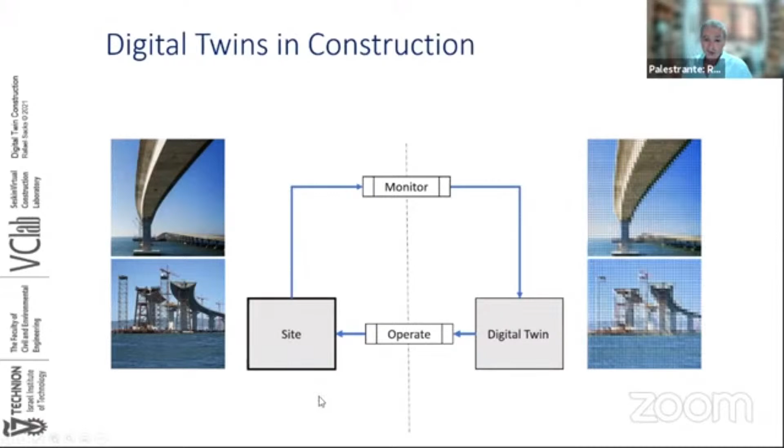Now, when we talk about the kinds of monitoring we can use in construction, they include a range of different things, from the basic kind of Internet of Things sensors like temperature, humidity, density, quantities, and so on, through laser scanning to build digital point clouds, photogrammetry, which might use 360-degree cameras or other images, through barcodes that might be read through barcode readers on the site, radio frequency IDs or Bluetooth tags that can be sensed by people's cell phones or smartphones or other equipment.

Many trucks and tower cranes and a range of other equipment have what we call a black box that monitors its equipment as it's operating. And some of those companies already have the telemetry that we need in order to get that information into the cloud and then into the digital twin for the project. We can also have people on the site using their smartphones to report things and to confirm that something is done or not done, or there's a problem, or take photographs.

We also have many construction companies operate enterprise resource planning software, like SAP or others. So purchases of materials, payments of salaries, accounting, timesheets for workers, and all these kinds of things are all available digitally. And not to forget that we also have audio recordings that we can also use.

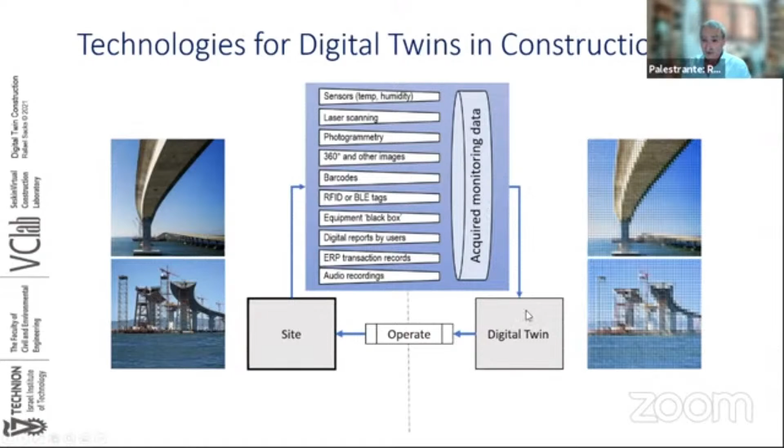And then we acquire all this monitoring data. And although I show this in a single arrow, we need to interpret it all to try to build up this digital twin. And of course, that's not trivial. That's really complicated. So the complication arises from the fact that the amount of information, the amount of data that's collected here is very, very large. And we can't use that raw data.

So what we really want to achieve is this thing called a project status model. Now, a project status model is a bit like a BIM on the left here, but a building information model really tells us what is the future of a building. A project status model tells us what's the present and the past of a building.

So to go from this raw data through to the project status model, we have to do a lot of work of interpreting and merging the information. And this is largely done with artificial intelligence. And that may be with rule-based systems or with image processing, computer vision, and other things. And so we're trying to go here from data to information.

The reason that we want to use the BIM as a supplement for information here is that often it's much easier to interpret something I can sense when I know what to expect. So if I have a point cloud with points that fall on a particular wall, of course it's helpful to know what the intent was in terms of having a wall in that place. Then I find points on that wall, I can make some logical conclusions about what those data points in the point cloud represent.

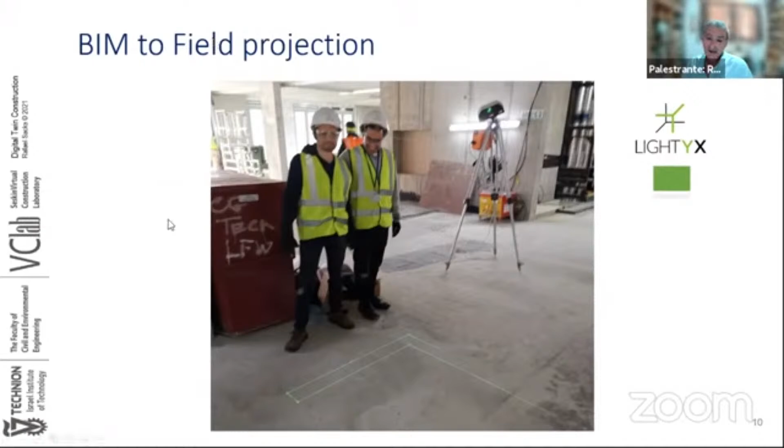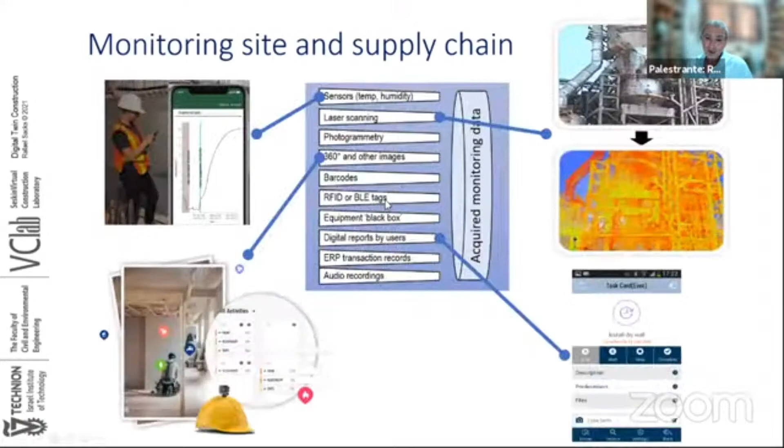But of course, the big challenge is this, and I'm going to go back for a moment to here. Each of those applications that you already see being developed, they each fit into just one of these sources at the bottom. None of them do this interpret and merge step, where they take information from multiple sources and create real project status information. It's not good enough for me to know, for example, that here there is an electrical socket missing, or that it's in the wrong place.

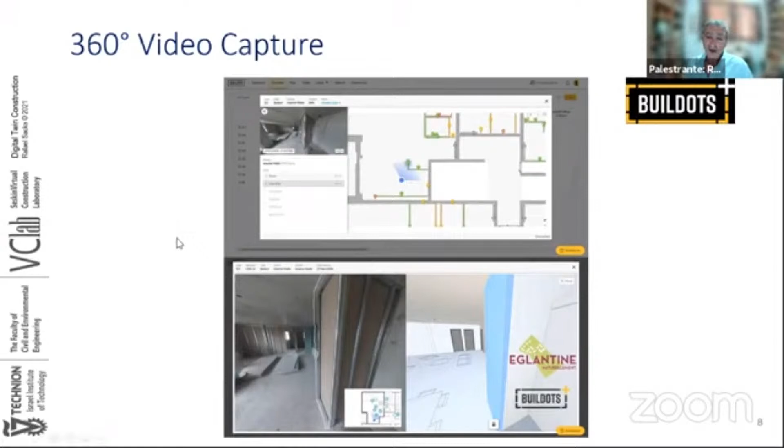I really need to know why it's in the wrong place, who put it there, how long it took them, what their productivity was, were there any other objects in the way which forced them to do something different. In other words, there's a whole context of information around that that I need to know to be able to say, okay, what should I do about it? What's the next step? So for making intelligent control decisions about what to do, it's not enough to know data or information. You have to have knowledge. And that knowledge has to have the context where you merge all of that information.

And we have a separate research project dealing with that. It deals with complex event processing, and I'm not going to get into that now. But what I do want to do is say this. When we think of the digital twin, what we really want to do, because we have a closed cycle of monitoring and operating, we want to use the real-time information streams to enable a closed-loop model of construction control.

And the best model we have for that is from lean construction, and that is the idea of plan, do, check, and act, or what is known in manufacturing industries as the PDCA cycle. And of course, we do this continuously. So in every planning and operation cycle, we plan, we do something, we study it, we check it, and then we take some action to change the way we're working, and then we repeat and do that repeatedly until the project is finished.

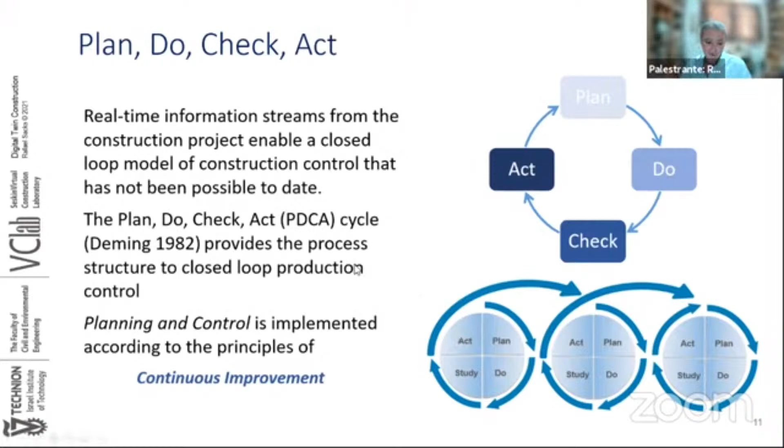So if I think of this cycle of plan, do, check, act in the context of the digital twin, then actually the first thing we're doing is we're doing digital modeling of a built facility. So we build a BIM model, and the BIM model is not only the product, but it's also the process. So we're talking about not just what we build, but how we intend to build it, and when we intend to build it, and who will build it.

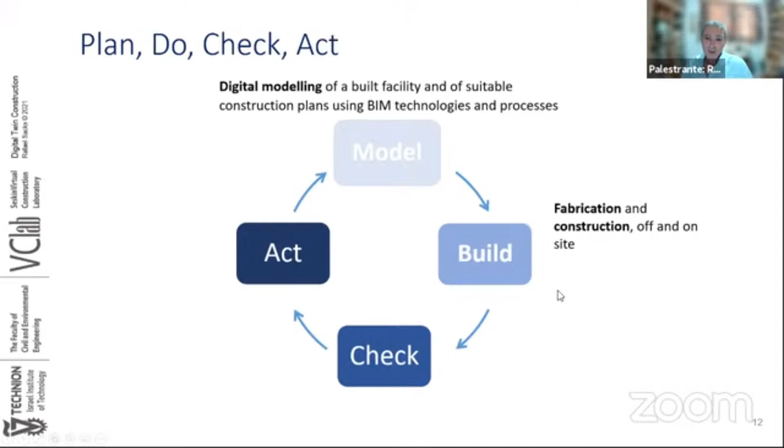And then we build. So we fabricate things off-site, we construct things on-site, and we operate the building site. And then, as I said up to now, we monitor and interpret. So this is the digital monitoring of the facility. We interpret that information using some intelligent software to generate what we call the process and product status.

And then we want to evaluate and improve. That's the act part. We want to evaluate what we've done. We also want to evaluate alternatives for going forward. I have a construction plan up to now. I have a schedule. But if I continue that schedule, what will happen? And if I change the schedule, if I change the construction plan or the methods, what will be the outcomes?

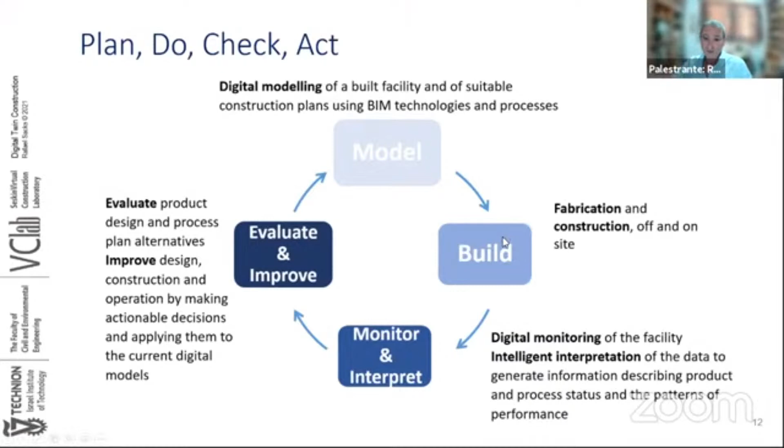And if I can do all that, and I come up with some better plan, an improved product design, then I need to go back to my model, change it in the BIM model, change it in the construction plans, and then use those to build in my next week or month cycle. So on the basis of that idea, we have a process map where we try to lay out the different components and aspects of what we call the digital twin design and construction process.

So you can think of it like this. It begins, of course, with the plan, do, check, act, and it's a series of these cycles. So if I do this, I can say, well, our process begins with designing. So I design some product and I plan a process. When I design the product, what I generate from that is our project intent information.

And I'm going to go back here just for the sake of these definitions. We have here PII, the project intent information. This is what I intend to do. It incorporates the BIM model. This really is the BIM model. On the basis of the BIM model, which is as-designed product and as-planned process, I then go and build. So I build the building, I operate the construction. That generates a physical twin. Now I'm generating real buildings.

And then I monitor them. And I monitor them using all of those technologies I mentioned before. And they generate for me raw monitored data. Now here, I want to call all this digital side the digital twin, but you can see right away that if this here is the BIM model, the PII, then that's quite different from all the rest of this stuff. So what is the rest of it?

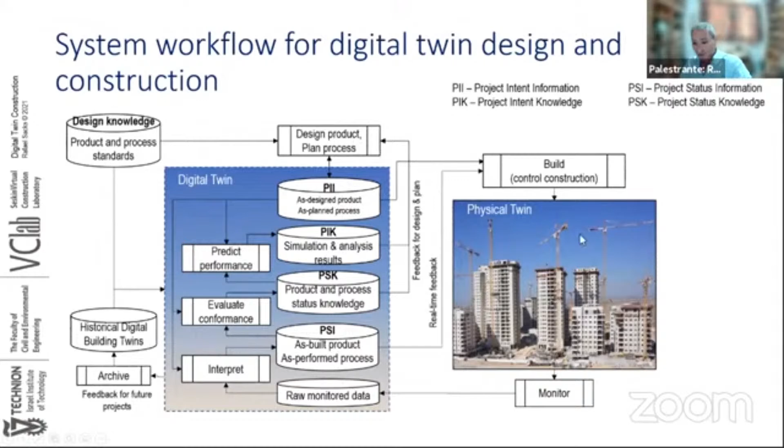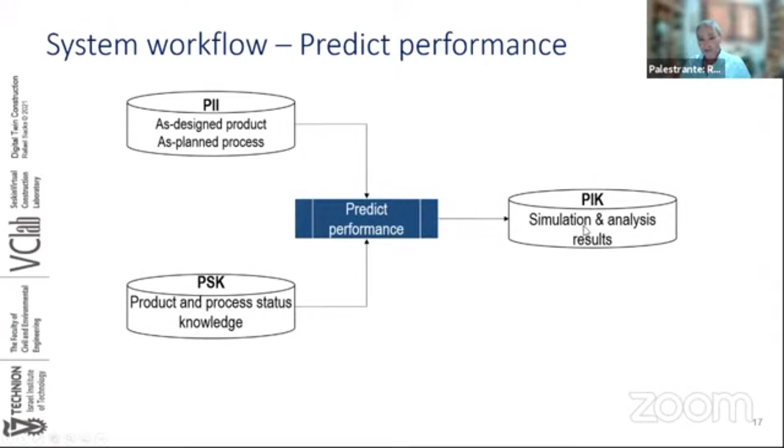And based on that knowledge, I'm going to redesign, replan, change those things, put them in the PII, build, and continue my cycle. And so if I think of it that way, if I focus for now on the predict performance part, then I'm comparing the project intent information and the project status knowledge about what the situation is. And I'm going to use those two things to try to predict what might happen in the future. And that will give me a basis of information for making decisions about what to change, if anything.

But then what we do is we begin now and we say, first thing, we need to know some things from the user, from the construction managers. These things are constraints, they're future constraints. When will equipment be available? When will it not be available? When will resources be available, like workers, like materials? What are the weather forecasts? A range of things that we might know about the environment, about the constraints that operate on our project.

On the basis of those constraints, we can generate what we call alternate plans. So I have a baseline plan, my current construction plan, and now I want to generate alternatives. Those alternatives are dependent on my constraints. So I might say, I'm using now 4 crews of floor tiling workers. But actually, if I need, I can have 5 crews or maybe 6 crews. So my freedom of action is to reduce crews or to add up to 2 new crews.

Once I've generated some alternative plans, I need to evaluate them. And that we'll do here in the simulation. So the simulation will tell me if you do A, the result will be B or C or D or something else. And actually, if I can simulate them, I can create an optimization loop where I say, if this is my alternative plan and this is the outcome, let me evaluate that, change my alternative plan, run it again, and I can do optimization here with genetic algorithms. And this is a fairly well understood process. So this is not necessarily something new, but the result is we can get new alternative plans, which are really quite good.

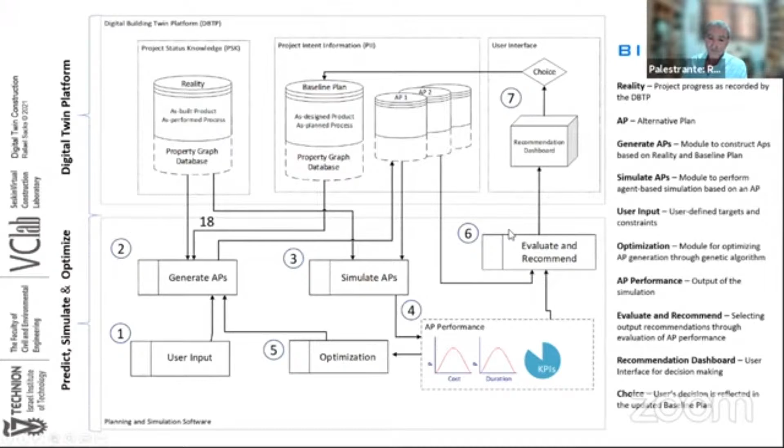So if you think of it this way, to try and explain it a bit more simply, we're taking, as I said, the baseline plan from the project intent, the project status knowledge of where we are. We have targets and constraints, like we can hire 1 more worker, we can purchase 2 more pieces of formwork, we can change the concrete pump. These are process actions.

We can change the method of doing the flooring. We can change the type of facade. We can maybe change the stair elements from cast in place to precast. These are product actions, or freedom of action, things that we can do. And based on all of these, we can generate alternative plans. Now, any given alternative plan is some combination of all of these steps that I might take.

And then if I have that database now of alternate plans, I can use my status of the project and perhaps historical data to get the construction plan, the building elements, and the agents that will be working. And I can run an agent-based simulation, and I can predict the performance. And what I'm showing here is the idea that the simulations are not singular, they're multiple.

So because it's a random number generated simulation, we don't get only one result, we may get hundreds of thousands of results. And so we have a distribution of results for the duration and for the cost, and perhaps for other key performance indicators. And these KPIs can be things like the quality of the flow, the amount of work in progress, the cycle time for individual products, and a range of others.

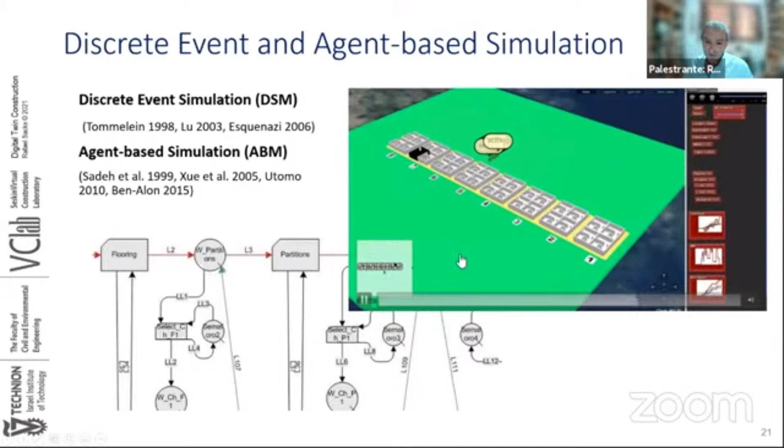Now, you might ask, what do I mean by the simulations? And I'll give you a quick idea. This is previous research that we have done. And some of you might be familiar with the LeapCon simulation, live simulation game. Well, this is a computer simulation of the same game, but the idea is that you have 4 contractors, and in the computer you simulate how they go through 8 floors of a building, and they build apartments, and as they go, they do different pieces of work.

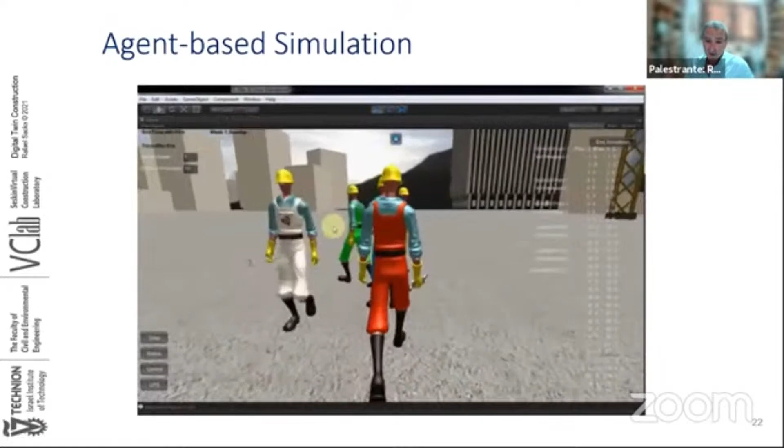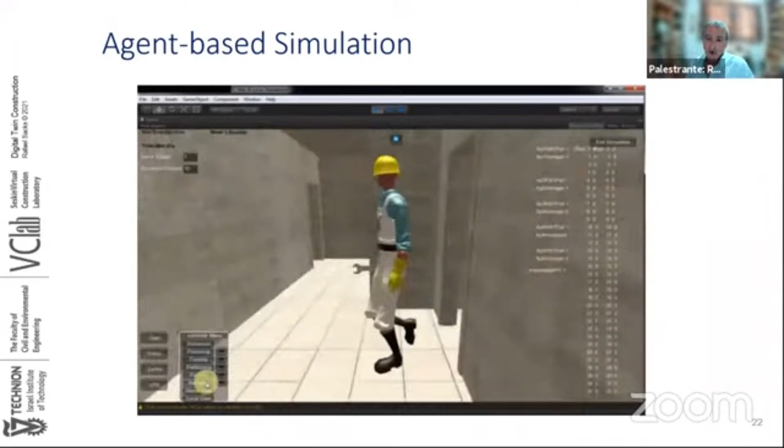This is another simulation that uses a BIM model and an agent-based simulation, where we see 4 different crews doing flooring and painting and plastering and drywall construction, and the computer can simulate their movement through the building. And of course, this is what we call emergent. That is to say, we don't program where they go, we program their behavior and their decision making.

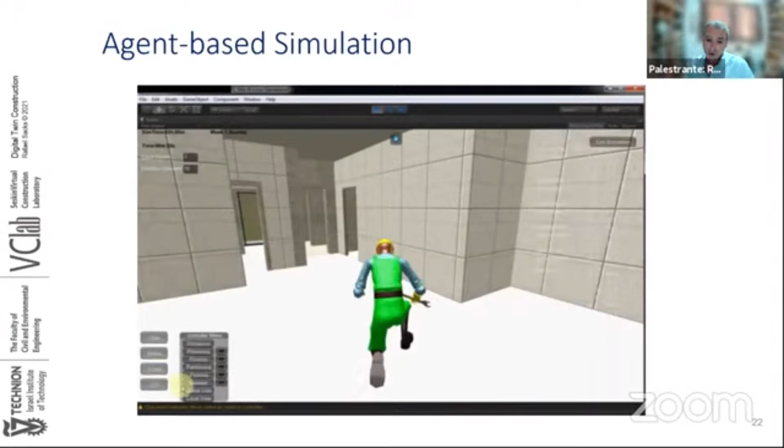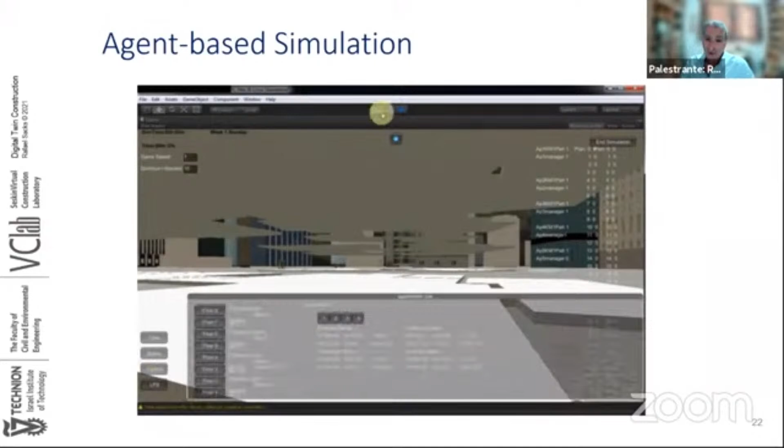And they then get information from the physical reality of the site. They make independent decisions according to the conditions that a subcontractor might meet on a real construction site, and they go and do the work. And the eventual duration and cost of the project is what we call emergent. And I'll show you just one last one to strengthen the idea.

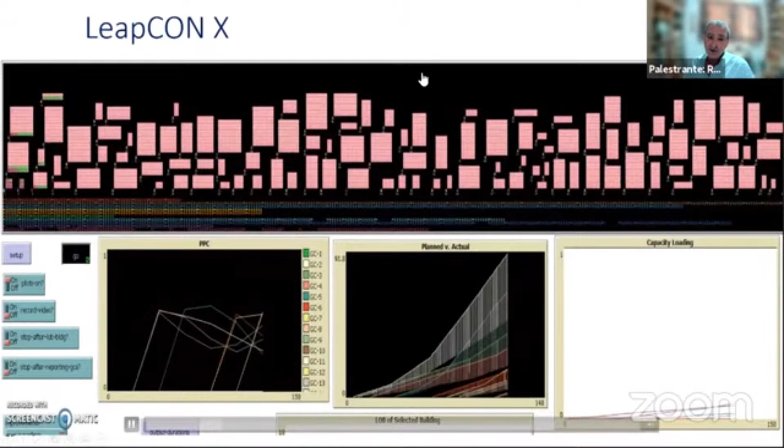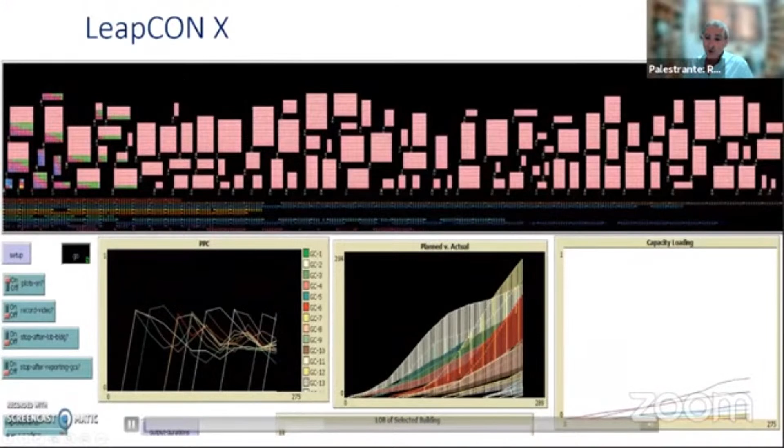What we're seeing here is a simulation not of one single building, but of an entire construction metropolitan area. This is a model of Hoboken, New Jersey. And each of these rectangles represents a building under construction. This represents 4 years of construction. Okay, so each building has a certain height and a certain number of apartments on each floor. And you see here the colors that are running, they run as each contractor goes through the building. And you see down here that slowly you see the development of the S curves for each project.

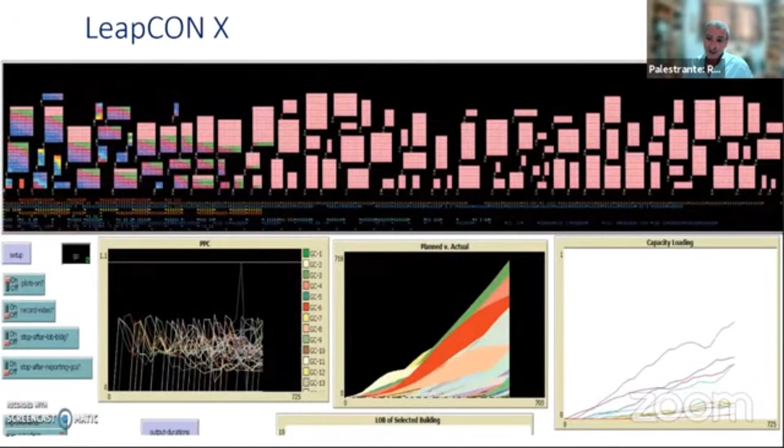So you can simulate these things not only on a single building. The reason that we're interested in multiple buildings like this in a simulation is that in any environment, projects compete for resources. So your subcontractor might be working on more than one project at a time. And that means that each project impacts on every other project that's running in parallel.

So this is the kind of dashboard that we are now designing with the idea of thinking to ourselves, imagine we have digital twin construction, imagine we're able to do the monitoring and get the status information and do the simulation and get the results. What kind of interface then can we expect to present to construction managers on site to give them an idea of what to do? And what this dashboard is trying to say is this.

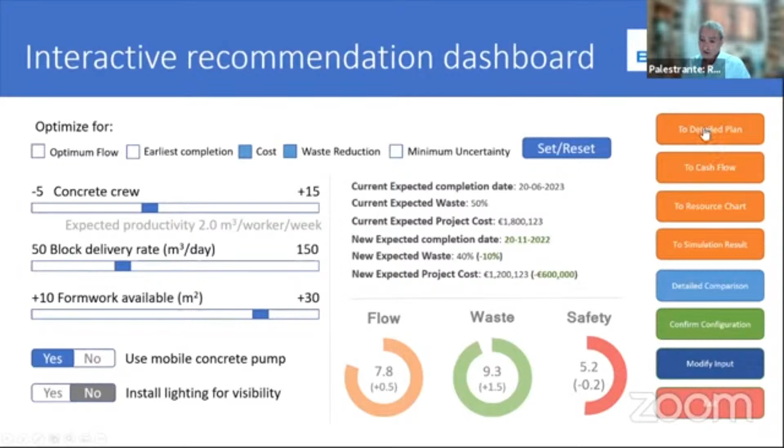So it's giving you a forecast from today to the end of the project, what might be the outcomes. And if you'd like, on the basis of those selections, to know more information, you can go to some of these buttons on the right-hand side here and get more information. So for example, you might say, if I make those decisions, how different will it be from the previous situation? So my current baseline plan might be here, and my new plan might be here.

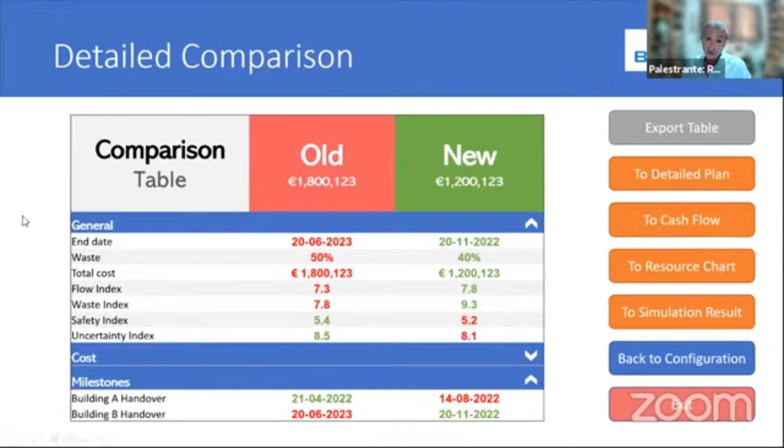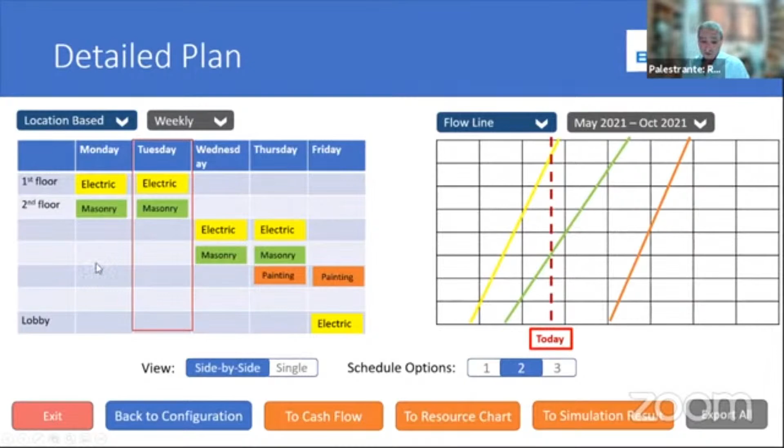And we might say, for example, if we're doing a detailed plan for a week, where are the different laborers going to be, where are the different crews going to be on the different floors of the building through the coming week? And how do we expect the flow of their work to look? Will there be intersections between crews? Will there be conflicts and so on? We might also say, what cash flow can we expect? And even, tell me also the histogram of the number of workers I can expect to have on site during this coming period.

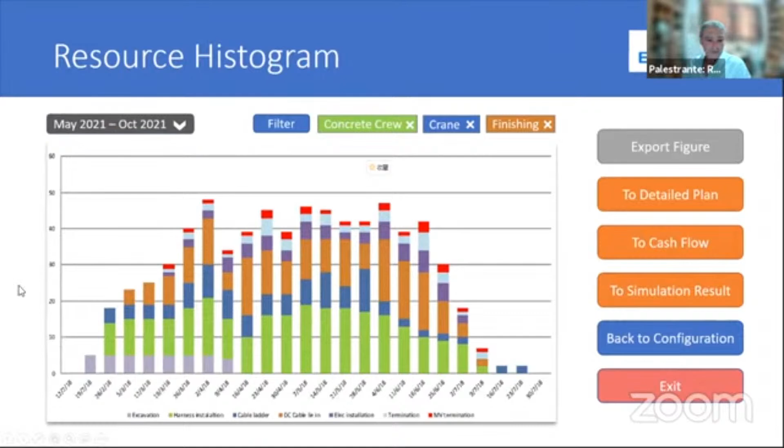Now, of course, you can make the leap of faith now and say, this control room does not have to be at the construction site. That control room can be somewhere else. Why not put it in the headquarter building of the construction company? That way we have fewer people on site and they can run it from here.

And then you can make another leap of faith and say, well, actually the control room is the same for any project. It's only the information that changes. So why don't we have a team here that manages more than one project? Maybe they manage 10 projects or 20 projects. Maybe each day they focus on one project. Or 4 projects per day, and they can do a site meeting once a week for every project.

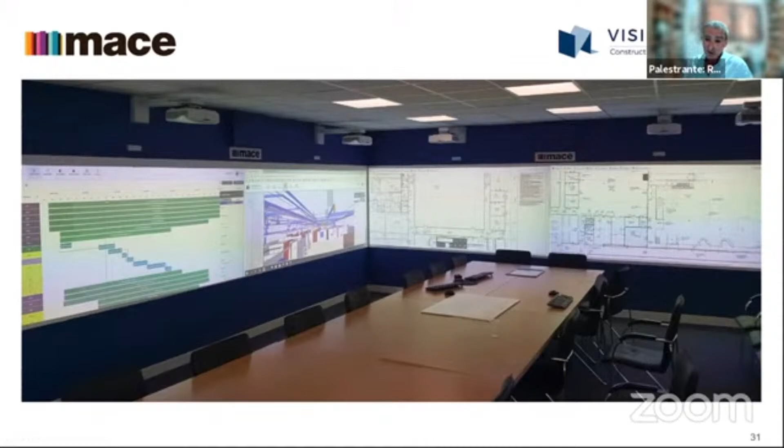Now, I should mention that this control room is not a mock-up. This is a real project control room from a project of Mace, which is a big UK construction management company. And this is from a computer server center that they built in Ireland, I think 2 or 3 years ago. And they use both BIM and VisiLean and other software to do this. So these kinds of construction production control rooms are starting to become real. These are on site, and there's no reason to think they would not be somewhere else.

And now you can make another leap of faith and say, who will provide all of this computing power? Who will provide the technology for monitoring? Who will provide all the AI systems? Well, it may be that there will be software or startup companies that offer this as a service. And then a general contractor might be able to subcontract production control to a central platform company that's running the same software for everyone. And that production control company could be a platform, a bit like Uber or Deliveroo or one of these major platform companies.

And so the potential exists for digital twins for construction to morph into something we call digital twin construction, where some of the current functions of construction management that are currently run by contracting companies may move to professional platform computer-based AI construction management, digital construction companies. And that's a radical and major change that we may see in the future. But the more we automate the information, the more likely this becomes.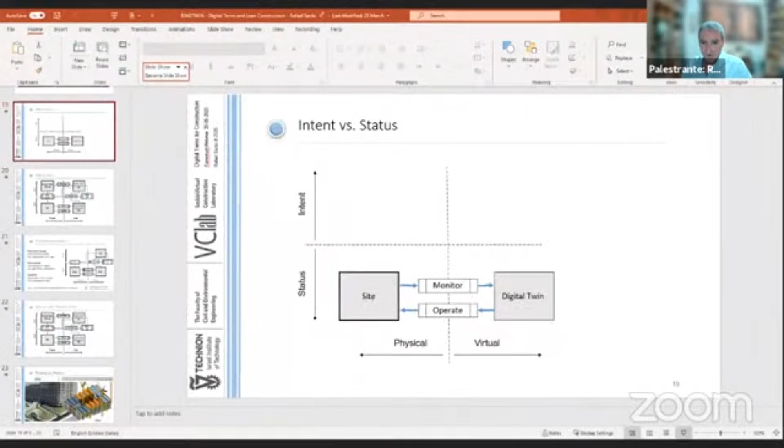I'm going to see if I can just show you a different lecture on this. Okay, please. Yeah, just bear with me a moment because I want to show one particular slide which was not in the set that I used. Let me try here. I'd like to share again, and I'll try and make this brief. Yeah, is that okay? You can see that? Okay. It's fine.

If you imagine that we have the site and the digital twin, then we have two dimensions of information. We have physical information and virtual information. So we have the physical site and the virtual digital twin. That's the first axis. The second axis we can define is a difference between what there is and what we intend to do in the future. So this axis between status and intent, if you like, is past and future.

And in the four quadrants that we now have, we can put here what I call project intent information, PII. Using the PII, we create a physical status. This is the physical building. And from that physical building, we can monitor and get project status information. This difference between project intent and project status is future intent and past reality. This part is the BIM model, because the BIM model represents what we intend to do. It's our design.

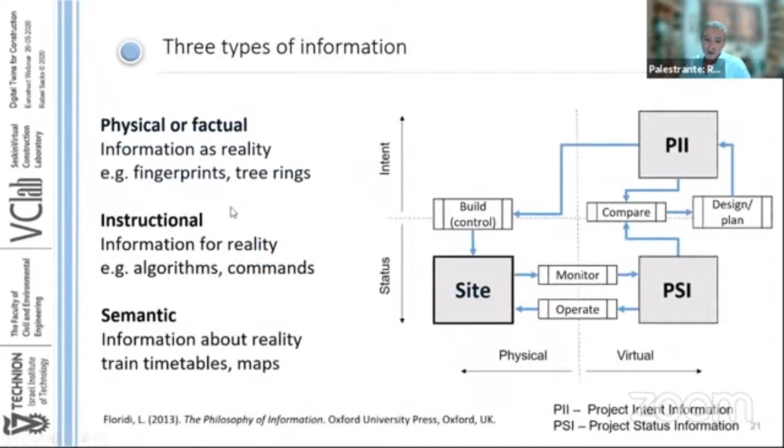If we think, for example, of doing a physical prototype, like a mock-up of a room or a window, that fits here. That's a physical expression of what we intend to do in the real building, but it's only a mock-up. But now we have another axis that I want to show you. The other axis we have is between product and process. So we have information about the building we're going to build, and we have information about how we're going to build it.

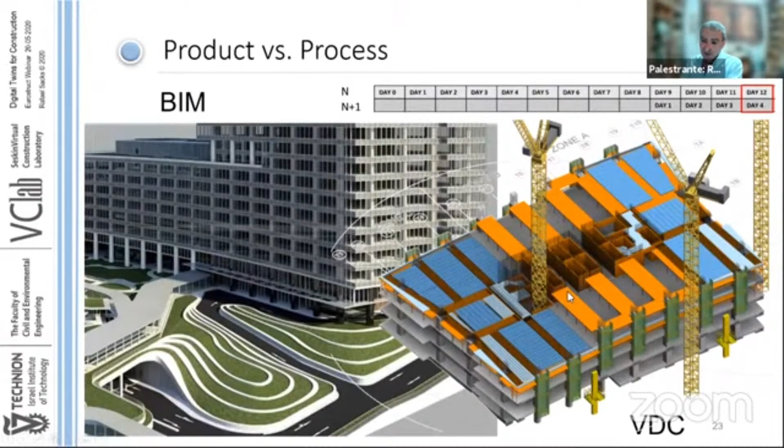Our schedule, our production plan, our production system, and so on. Now, if we think of those three axes, then we have the physical and the virtual, we have the status and the intent, and we have the process and the product. And now we have 8 quadrants. 2 of the quadrants here at the back, the physical intent, generally we don't have. So we only have these 4.

These ones, the building and construction, the construction process, that we understand very well. Those are physical things. The PSI as built and the PSI as performed is all the information about what was done. It's usually in the form of point clouds or measurements and so on. It's not necessarily building objects, but it's not what we generally think of as the BIM model.

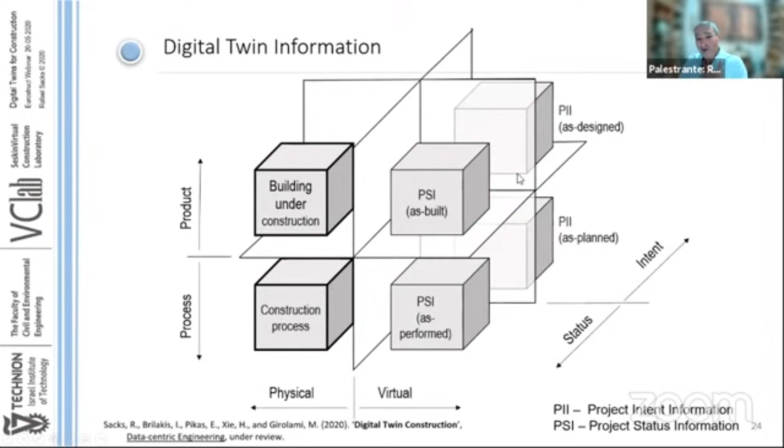So these 2 parts here, the PII as designed and as planned, this is what we think of as the BIM, at least what I think of as the BIM model. And you can think of it in this way. If we talk about digital twins as kind of people, that's our metaphor of people, then people have a lifetime, and twins are conceived and they're born and they grow up and they grow old. And so we can think of it that way.

Here is a building project with BIM. We have a start of conceptual design. We design something in this period of time, going from left to right. Then we can start some prefabrication off-site. So we have off-site prefabrication. So we start making things. This blue part is the physical part. And then on the start of construction on the site, we begin building.

We install construction plant. That might be a crane and a fence and the formwork and scaffolding and so on. And we also build the building itself. And as time goes by, we add more and more physical pieces. In the end, we have a project that we hand over. Now, at the same time, we're doing design and we're creating a virtual representation of that building. From day one, at the start of design, we start accumulating the BIM models, the products and the processes, the construction plans and the BIM model with all its complexity.

But now, once construction begins, off-site and on-site, we begin monitoring what's happening. So we begin taking movies, doing laser scanning, collecting Bluetooth information, RFIDs, barcodes, everything. And that gets compiled in this database. It's the as-built product and the as-performed process. Now, from a principled point of view, we should keep these 3 things separate in our minds.

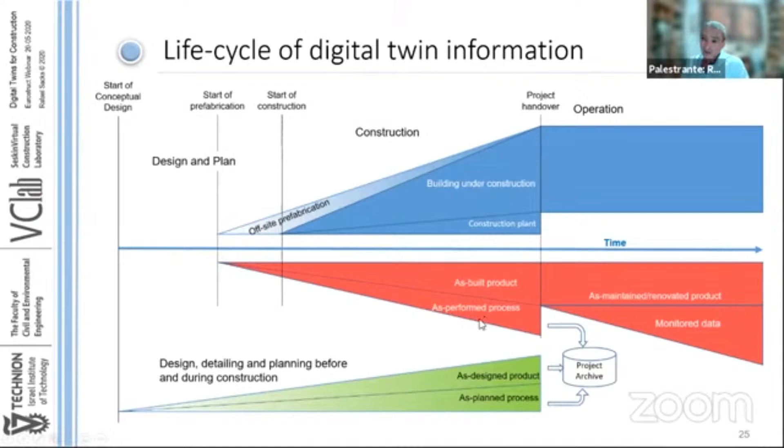Now, when the building is finished, we move it into operation, and the as-built information, we move into what we call here the digital twin for operations and maintenance. Now, that's different from the construction digital twin. Over here, there's a transformation of information. And the information about the process, who the contractors were, when they came, how long it took, what was the productivity, plus all the BIM models, they all go into a project archive, which is what we might call our historical digital twin. And we can use that to get useful information for future projects.

So what I want to say here is that this is the BIM information, this is the project status information. Although they are very closely related, they're not necessarily the same thing conceptually.

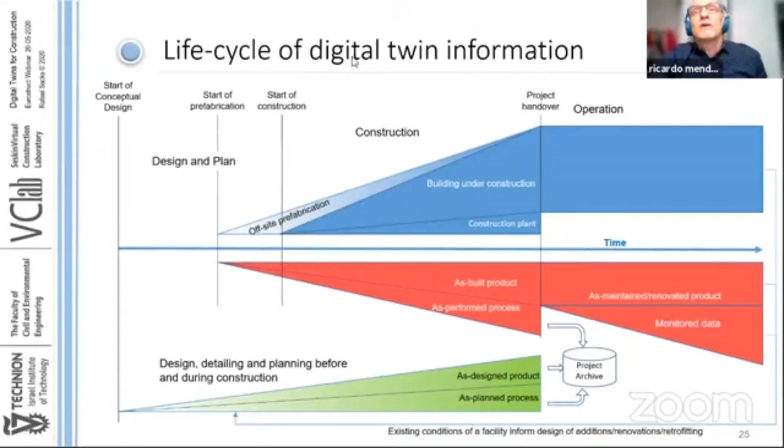Okay, thank you for your extra explanation. We'll go to the last question. It's from Gabriel Coutre. Thank you, Gabriel. It's the 1 million question. How to change the mindset of the traditional engineers to use new technologies?

If I answer this correctly, do I get $1 million? Probably. Probably. You know, even if you say yes, I'm afraid I don't have the answers. It wouldn't help me. Oh, you won't get money.

Often people ask this question: how do we change people's mindset? How do we encourage people to adopt BIM, to adopt virtual design and construction, to use monitoring technologies, to use modular construction, offsite, a range of questions. And I think that fundamentally, people behave in their interest. Now, I say that very carefully. I don't want to say in their economic interest, because there is a great body of research in behavioral economics which tells us that behaviors are not necessarily what we perceive as being rational in traditional economics.

They're often guided or motivated by influences that don't have to do with earning some money or having the best outcome or the best result. They have to do with status, with motivation, with how people perceive themselves, with how they respect themselves, how they think other people see them, and so on, as much as they may have to do with being successful economically.